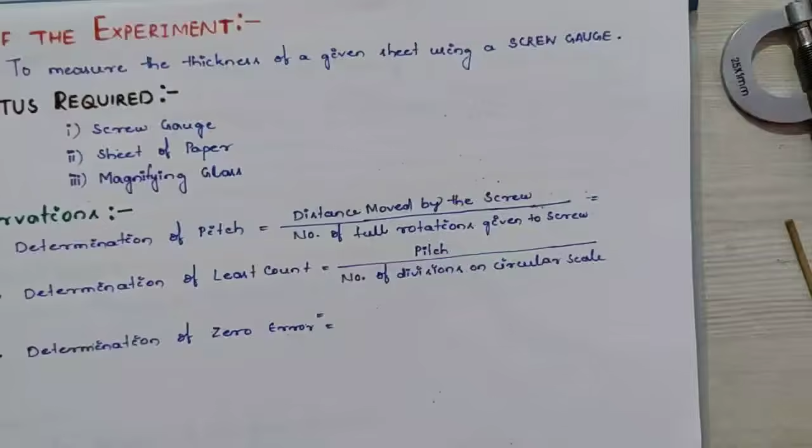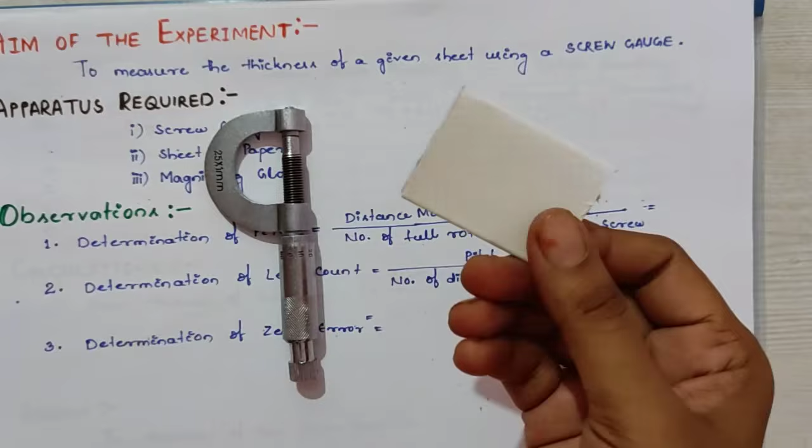Now we will see another experiment using screw gauge, to measure the thickness of a given sheet, that means a paper sheet, using a screw gauge. The apparatus are the screw gauge and a paper sheet, which I have folded like this manner. So we have to measure the thickness of this paper folding.

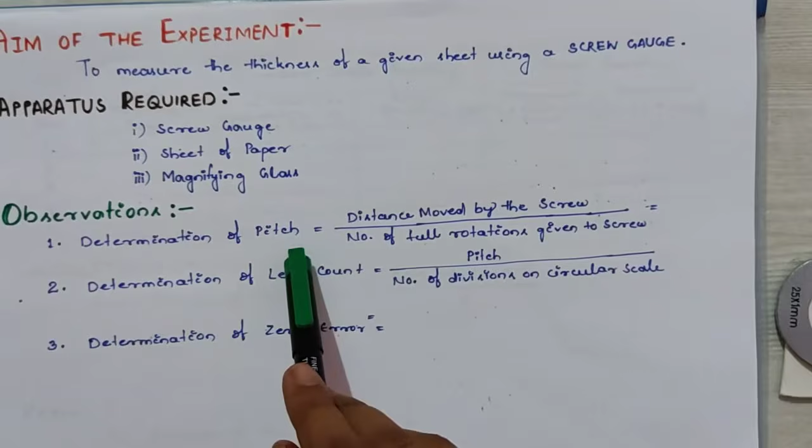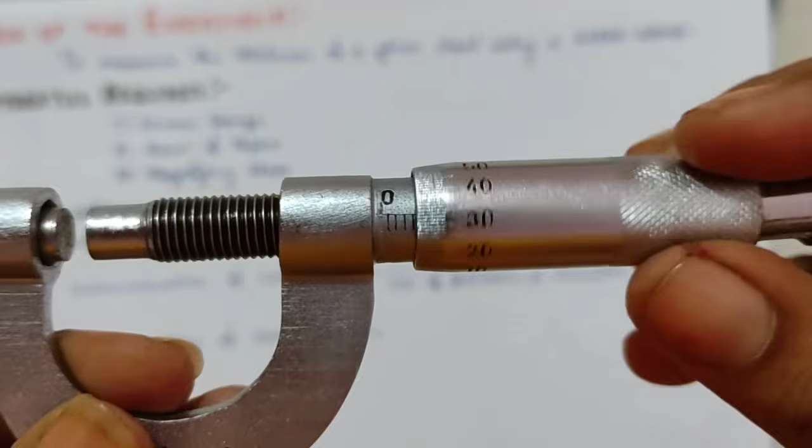Before that we will determine the pitch of this screw gauge. Suppose I am opening it to the 5th division of the linear scale. Yes, it is 5 now. So the reading on the linear scale is 5, and we have to mark the number of complete rotations. Here we have just completed 1,

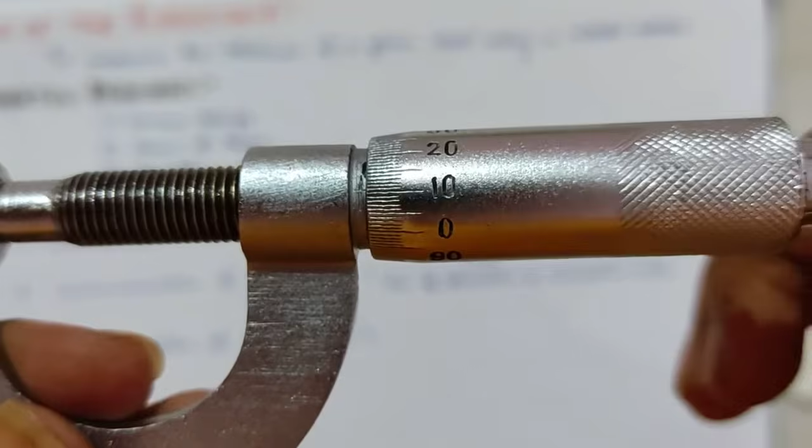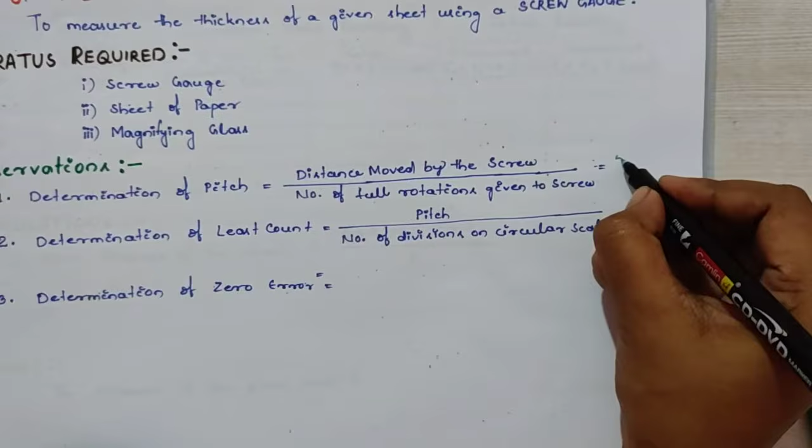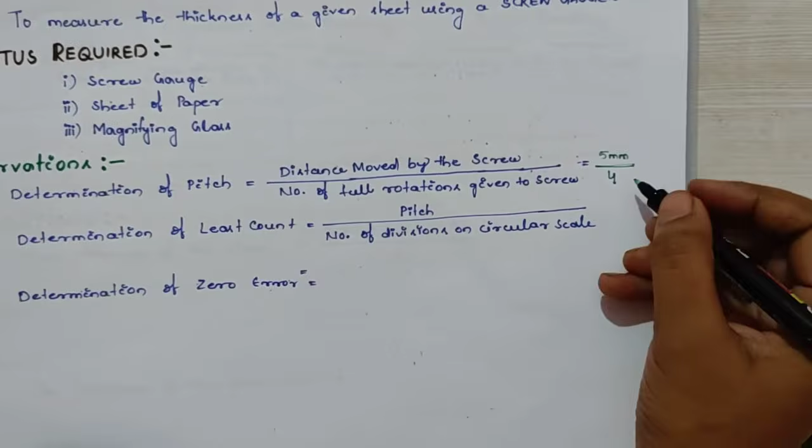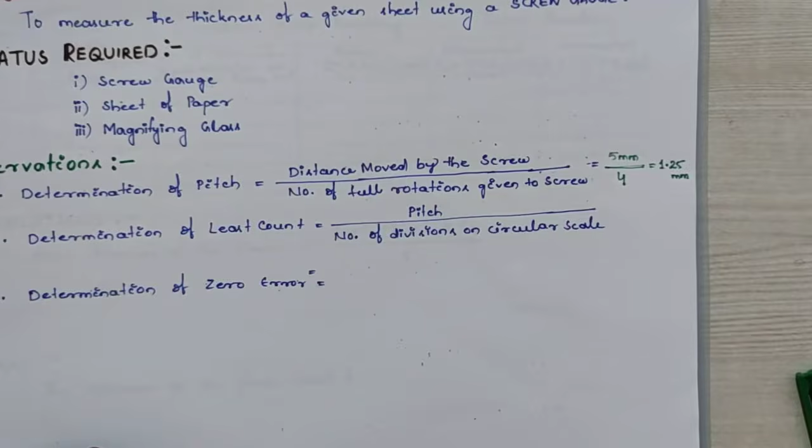2, 3, 4, and done. So we are getting 4 complete rotations. We just saw that the distance moved by the screw is 5 millimeter, and the number of full rotations given to the screw to cover this distance is equal to 4. So pitch equals 5 divided by 4, which is 1.25 millimeter. So the pitch of this instrument is coming as 1.25 millimeter.

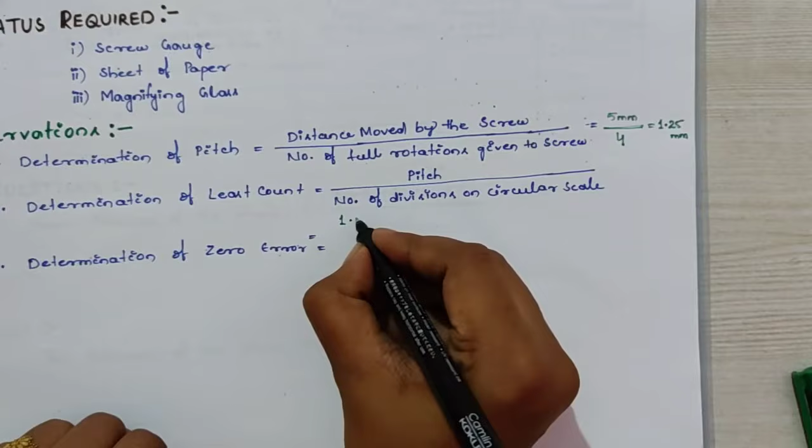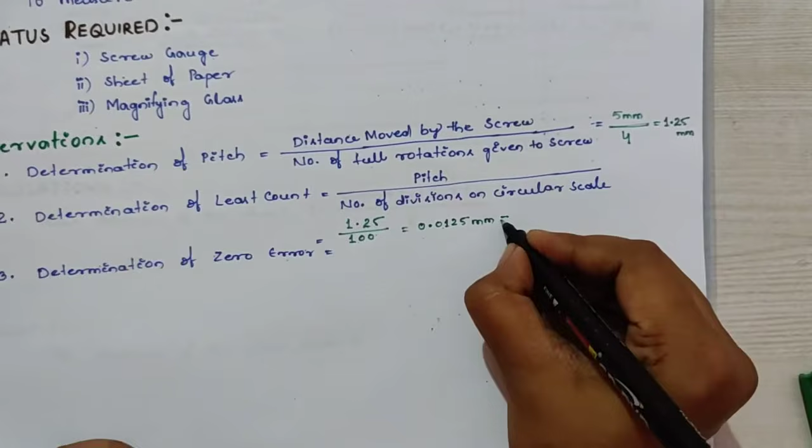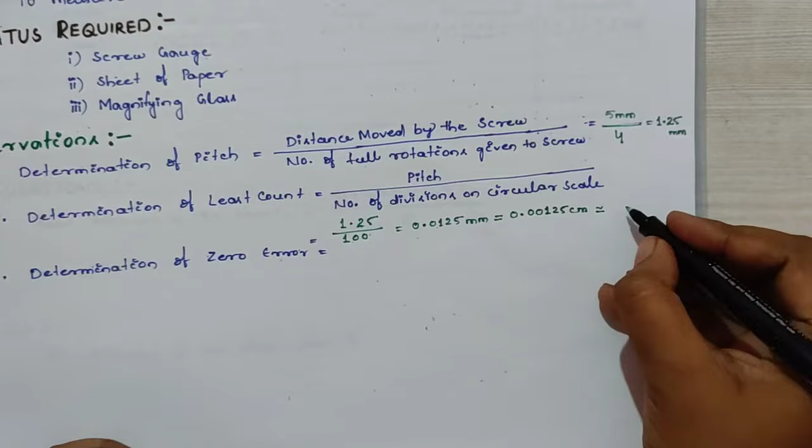Next, we have to determine the least count, that is equal to pitch divided by number of divisions on the circular scale. So that will be equal to 1.25 divided by the total number of divisions, that is 100. So that will be equal to 0.0125 millimeter, or 0.00125 centimeter. As we know, generally the least count of the screw gauge is taken to be 0.001 centimeter, so we will consider this one.

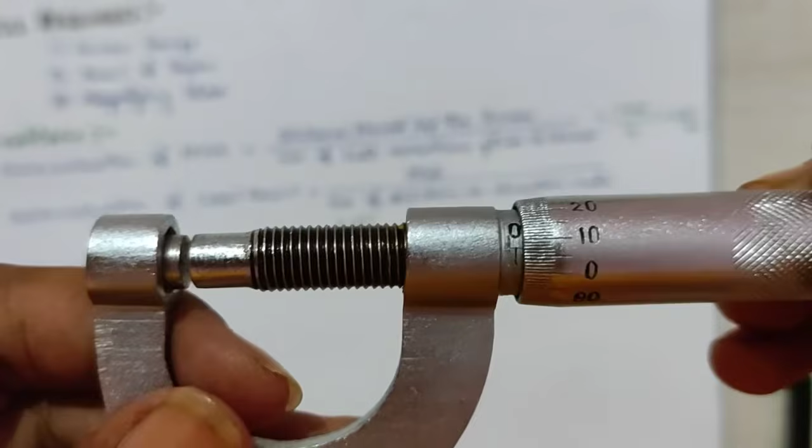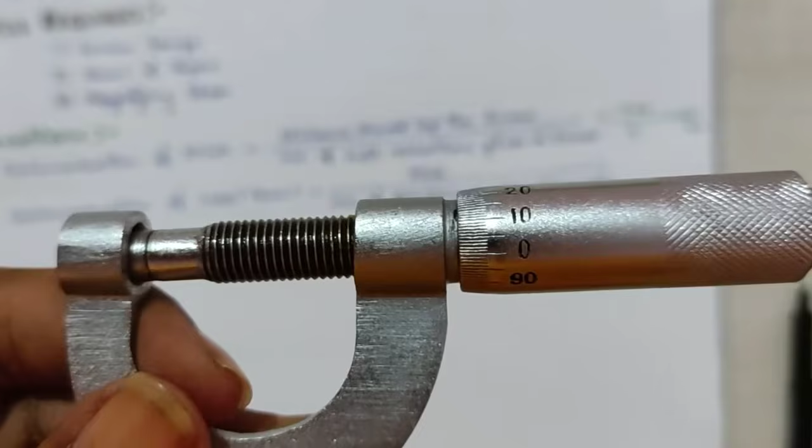Next part, the determination of zero error. Let me open it and close it so that you will see the 0 of the reference line and the 0 of the circular scale. Yes, so you can see here, this is the 0 of the linear scale, and here is the 0 mark of the circular scale.

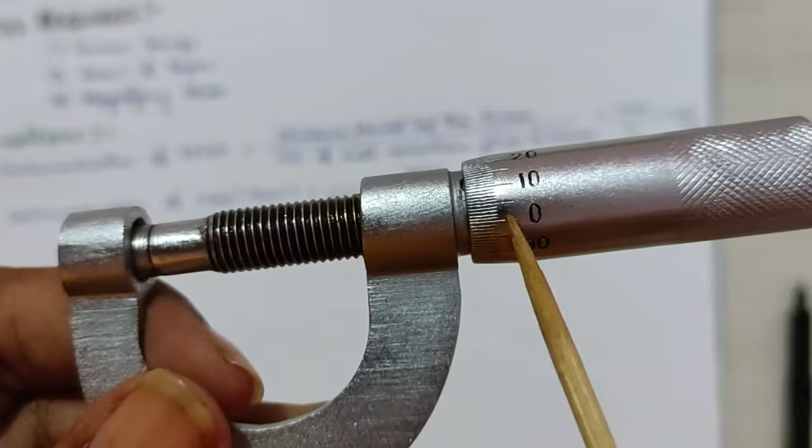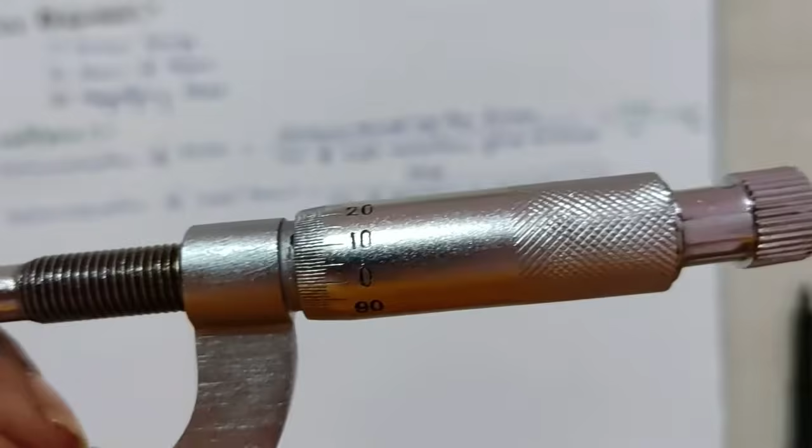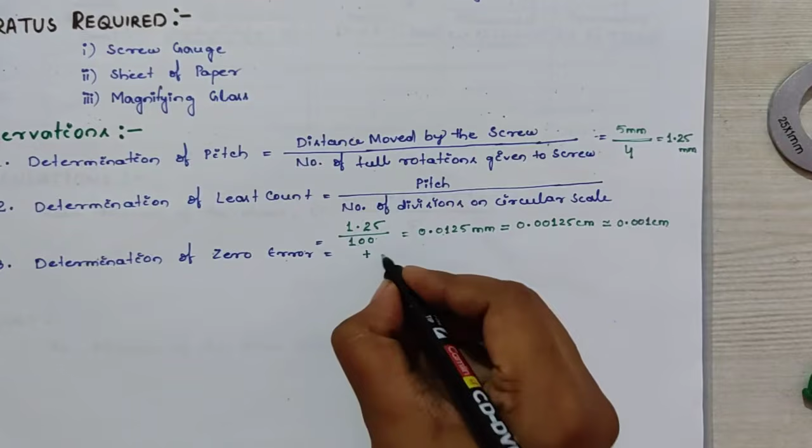Here we can see that the 0 of the circular scale is lying behind 7 divisions, that is 5th, 6th, 7 divisions behind of the linear scale 0 mark. That means this instrument has a zero error, which is positive zero error. So we can write it as determination of zero error, it's a positive zero error. So now I can write the zero error as plus 7, because this 0 of the circular scale is lying 7 divisions behind the 0 of the linear scale.

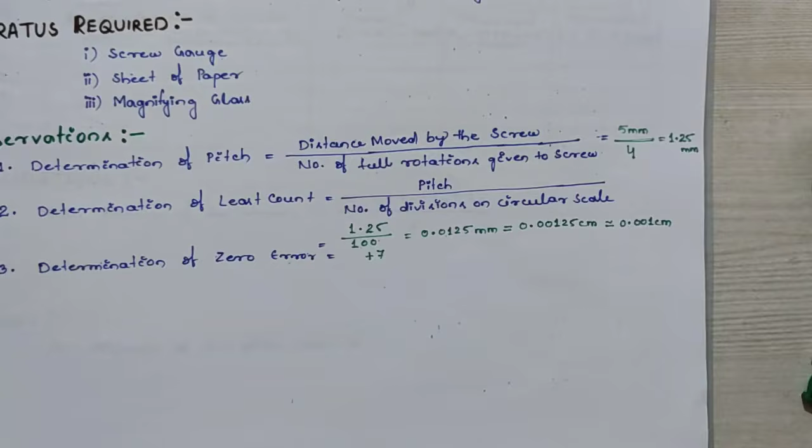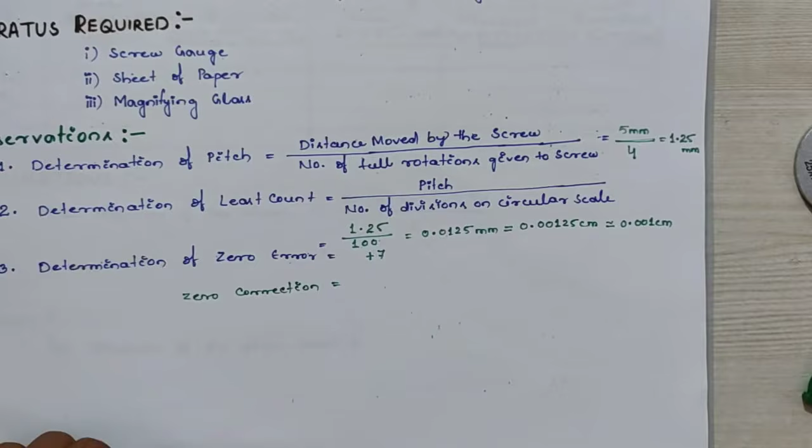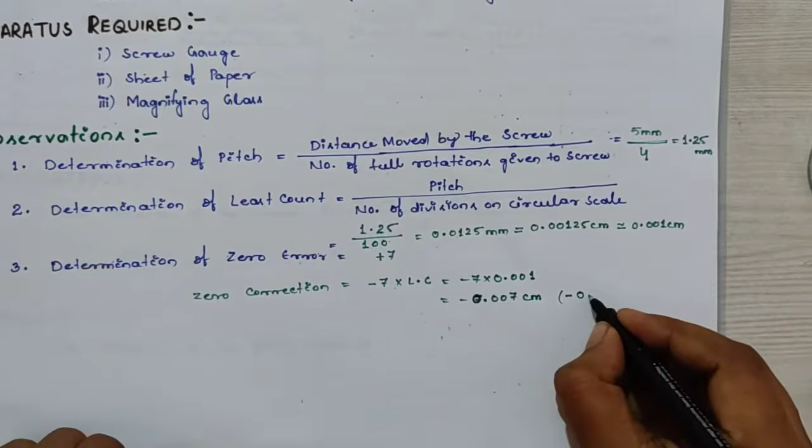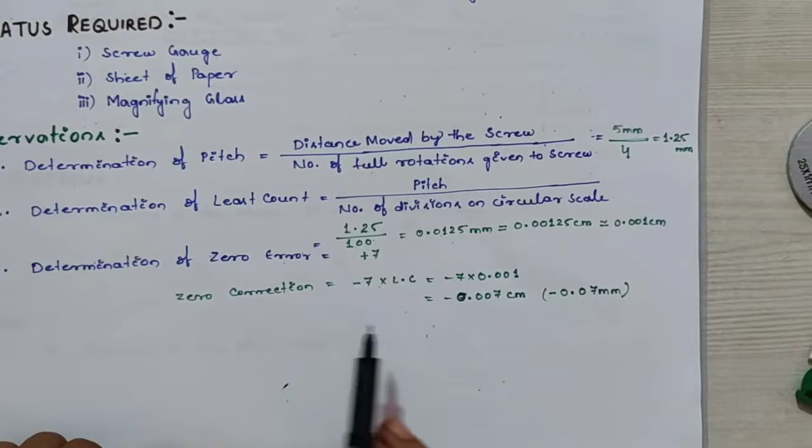Next part, we need to find the zero correction. Since the zero error is positive, the zero correction will be negative, and that will be equal to minus 7 into least count. So that is minus 7 into 0.001 centimeter, that will be minus 0.007 centimeter, or we can write it as minus 0.07 millimeter. If I consider 0.01 millimeter as the least count of the instrument, the zero correction will be minus 0.07 millimeter or minus 0.007 centimeter.

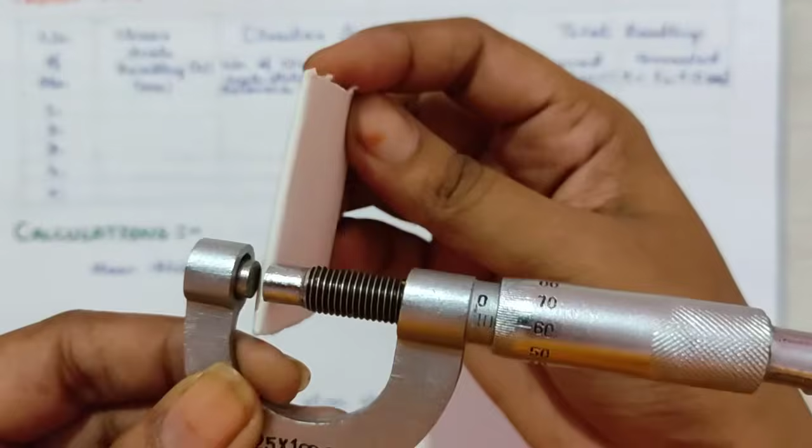So next we will move to the measurement of the sheet. First of all, we have to open the plane surfaces and put this sheet of paper, or paper folding, within the place, and make it tight so that it will hold the paper piece sharply. Yes, it is perfectly fixed now.

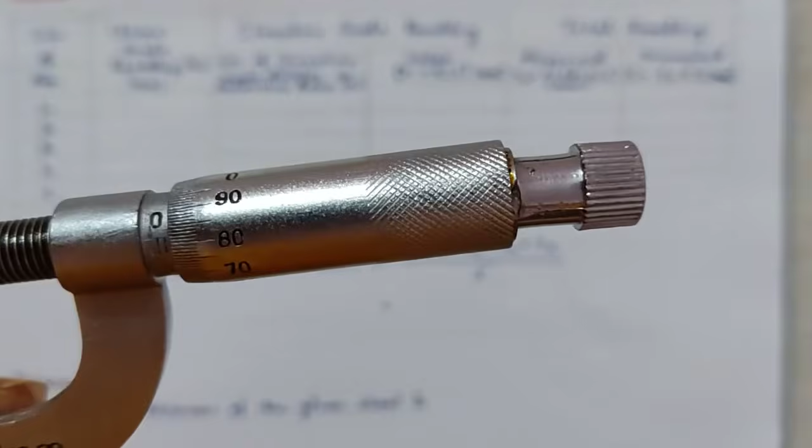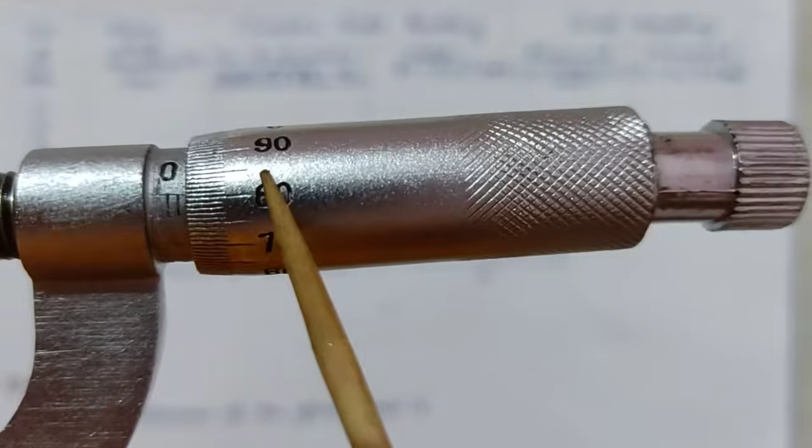Okay, so now first of all let's mark the linear scale reading here. As you can see, it has completed 3 divisions on the linear scale. So the linear scale reading will be 3 millimeter, and the circular scale division will be equal to, as you can see, just checking by eye level, it is coming as 80 divisions on the circular scale.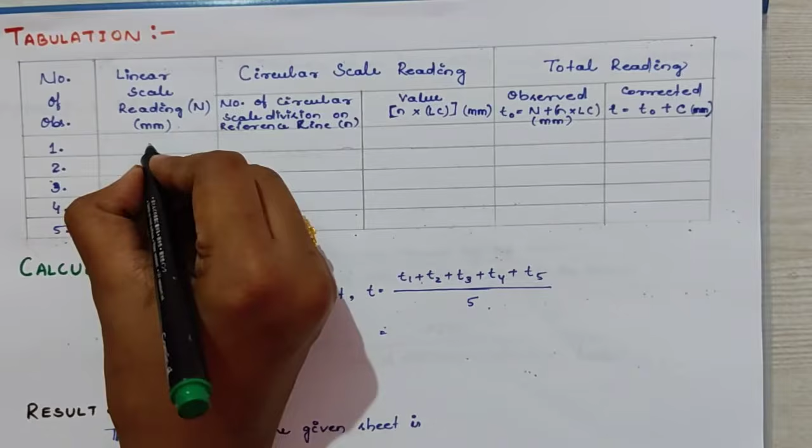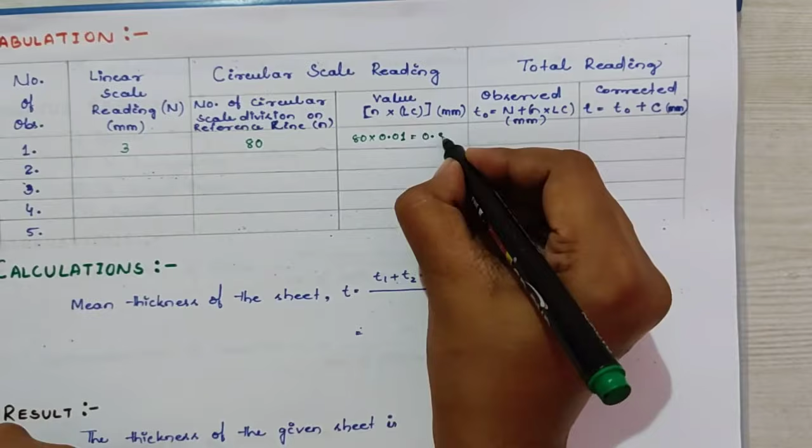Linear scale reading is equal to 3 millimeter, number of circular scale divisions is equal to 80, and the value of circular scale reading will be 80 into the least count in millimeter, that is 0.01 millimeter. So this will be equal to 0.8 millimeter. Now the observed thickness of the paper folding or paper sheet will be equal to the sum of this linear scale reading and the circular scale reading.

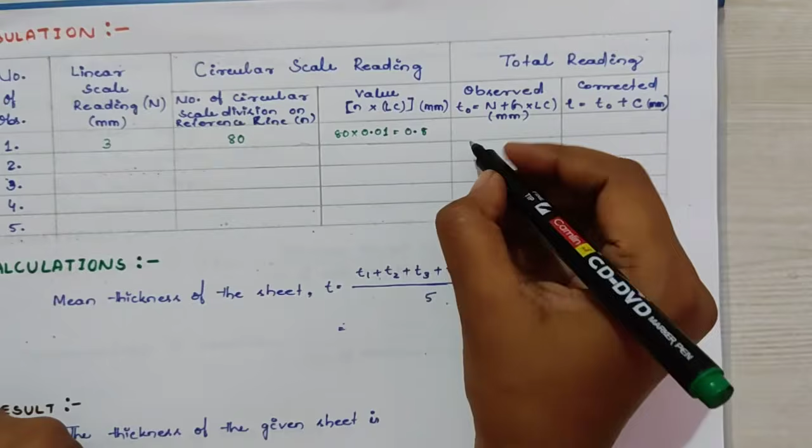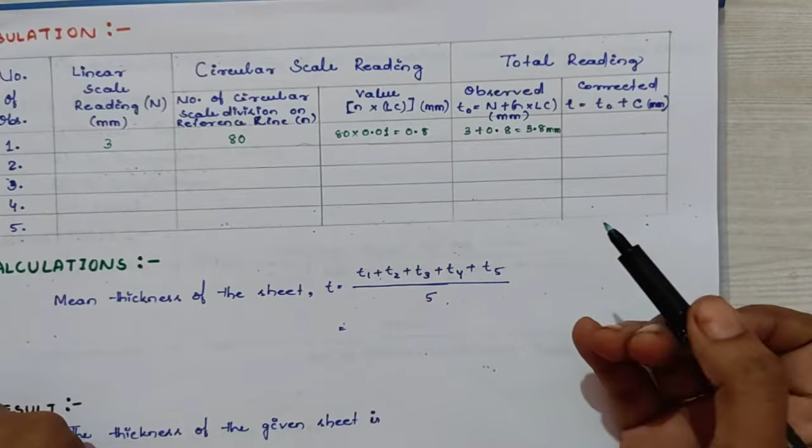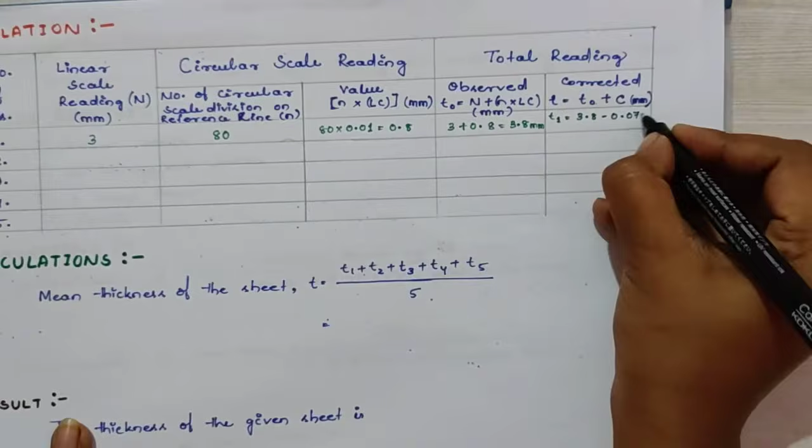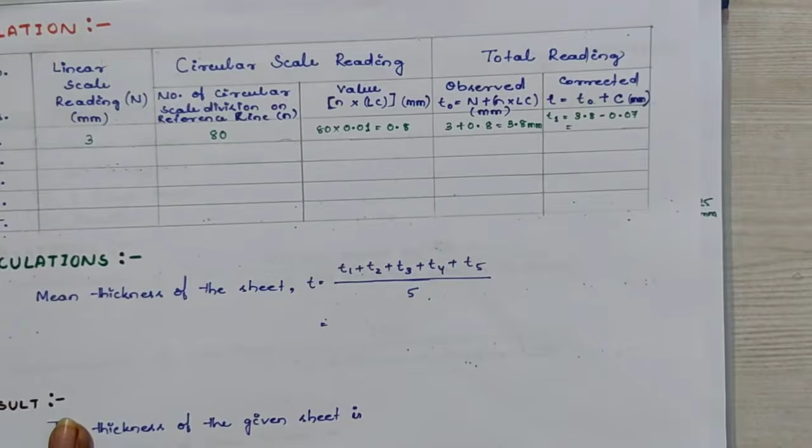So that will be 3 plus 0.8, that will be 3.8 millimeter. The corrected thickness will be the sum of observed thickness and the zero correction, which we know from the previous case is 0.07 millimeter. So we have to add this, that means T1 will be equal to 3.8 minus 0.07 millimeter. So that will be equal to 3.73 millimeter.

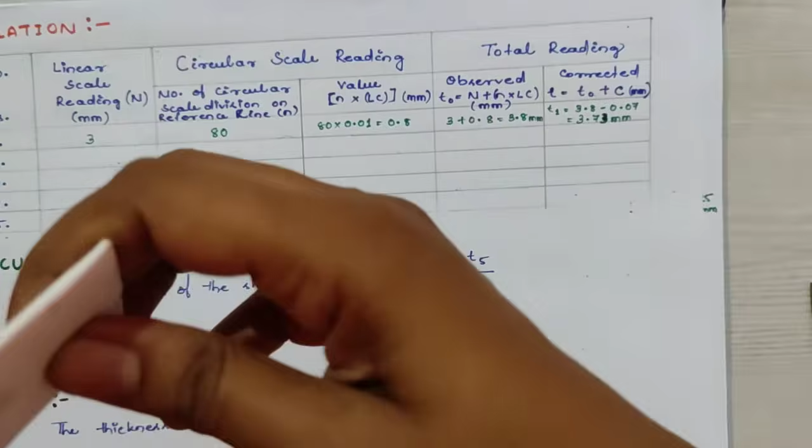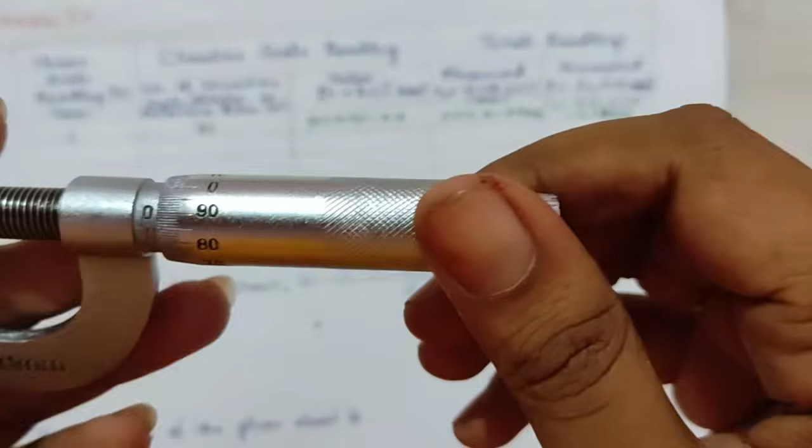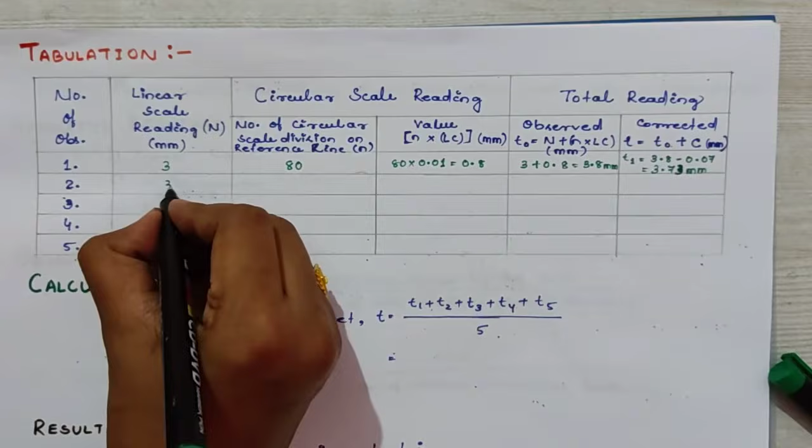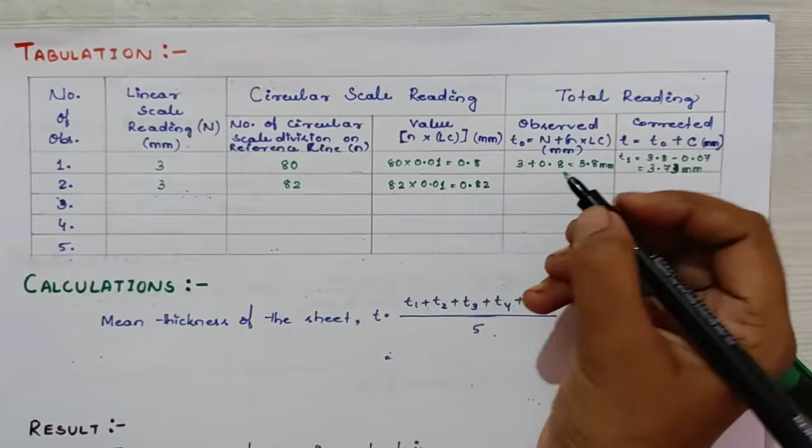This is 3 actually. So similarly we will continue for the next 4 observations. Now let us fix the paper folding at some other place. We have to fix it like this, and let's observe what linear scale reading we are getting. Again it is coming as 3 divisions, and the circular scale division on it is 82. We are getting 82 as the circular scale division and linear scale reading equal to 3 millimeter. So this will be equal to 82 into 0.01, that will be 0.82, and that will be 3 plus 0.82, or 3.82 millimeter.

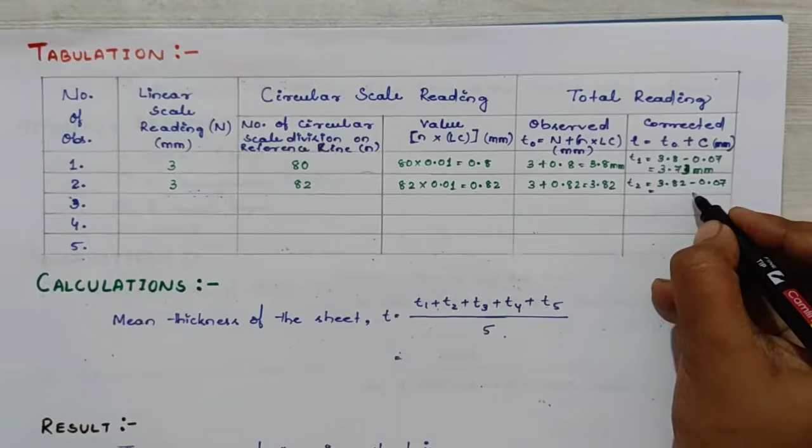T2 will be equal to 3.82 minus 0.07, so that will be equal to 3.75 millimeter. Okay, clear? So now let us take one more observation with it.

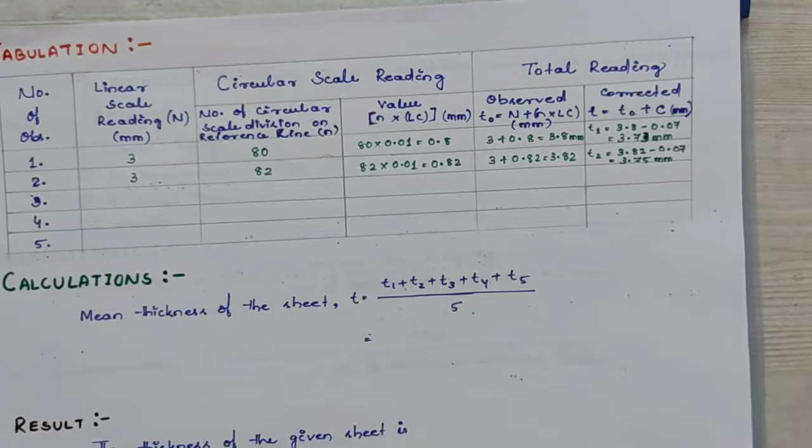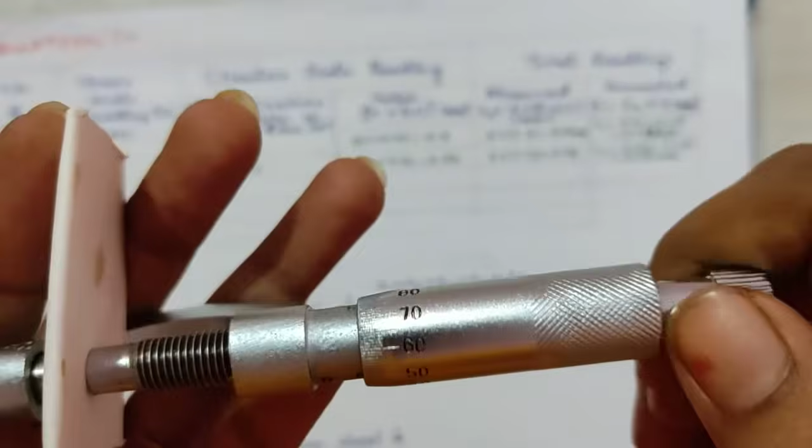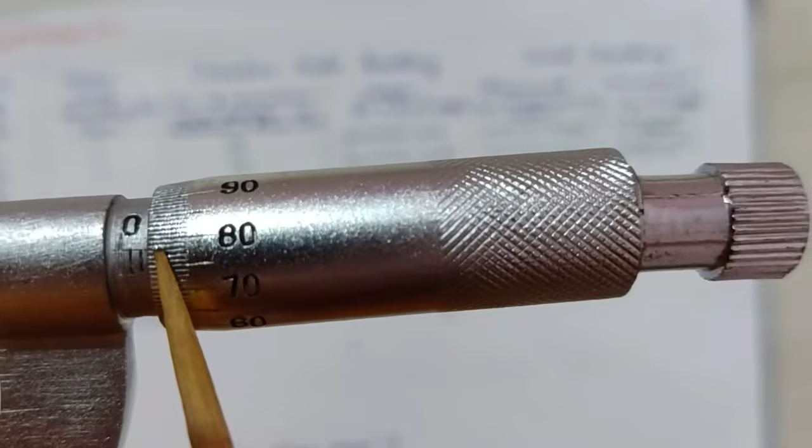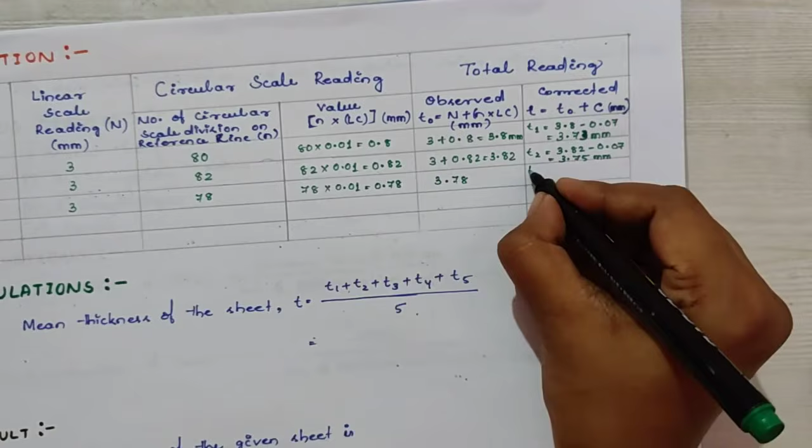I'm just fixing the paper sheet. Yes, it is perfectly fixed now. Now let us take the linear observation. Linear scale reading is again equal to 3, and the number of circular scale division is coming as 78. This line is coinciding with it. So this is 78. This is equal to 3, this is equal to 78, so that will be 78 into 0.01, that will be again 0.78. That will be 3.78. And here T3 will be equal to 3.78 minus 0.07, so that will be equal to.

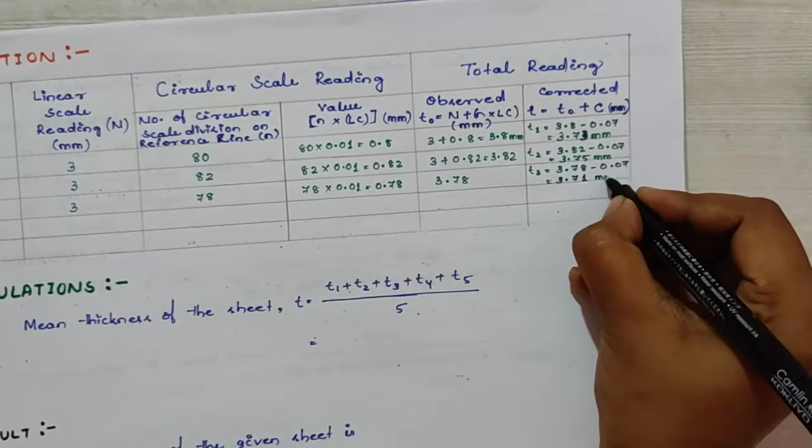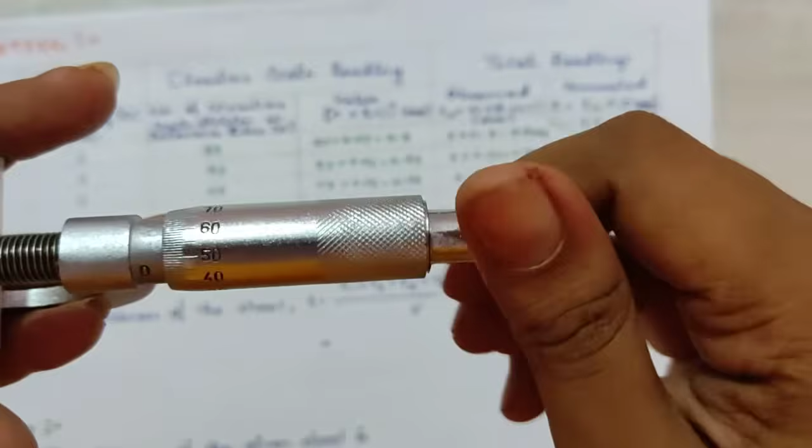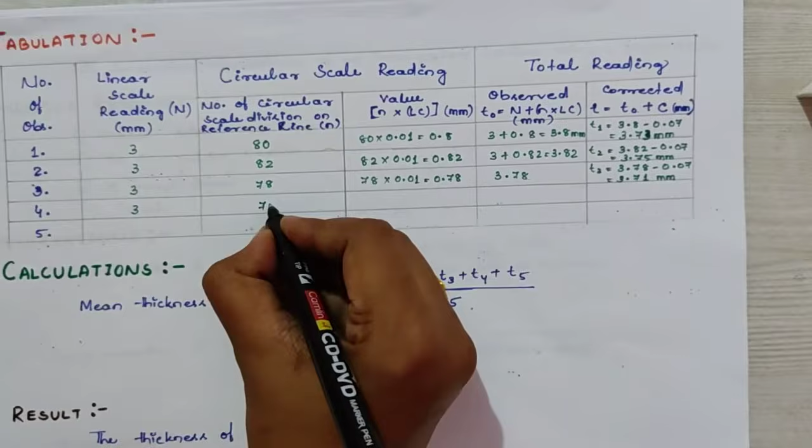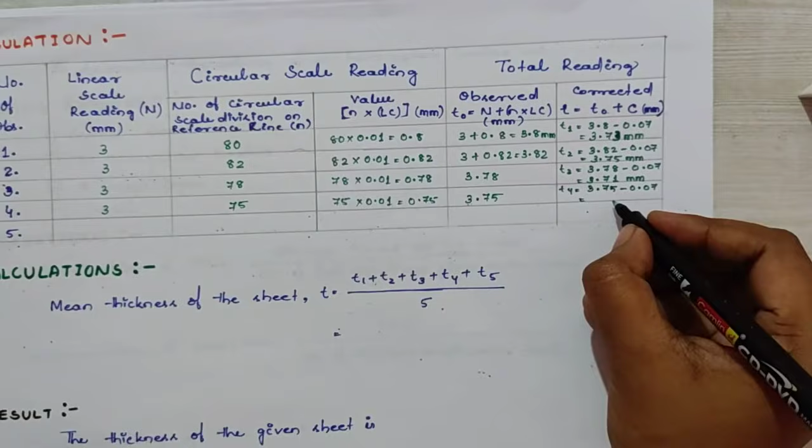3.71 millimeter. Okay, clear? Now let us take one more set of observation with it. I'm just trying to fix the paper sheet properly. Yes, it is fixed, and the linear scale reading is again equal to 3, and here it is little more, 75 is coming as the circular scale division. This is equal to 3, this is equal to 75, so that will be 75 into 0.01, that is 0.75. This is equal to 3.75, and T4 will be equal to 3.75 minus 0.07, so that will be equal to 3.68 millimeter. Okay, clear everyone?

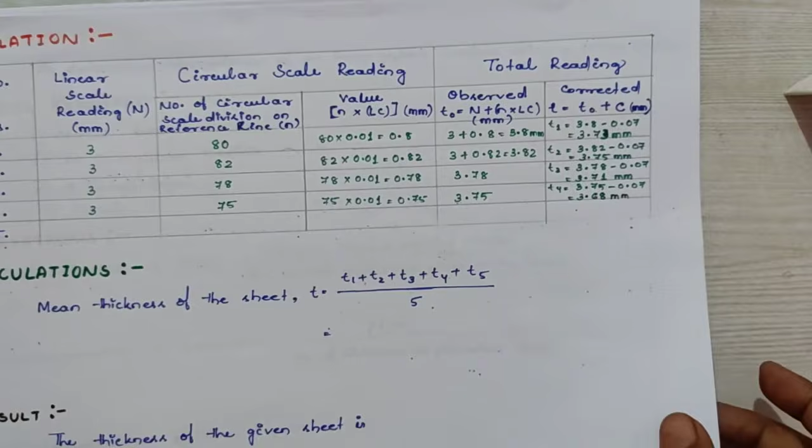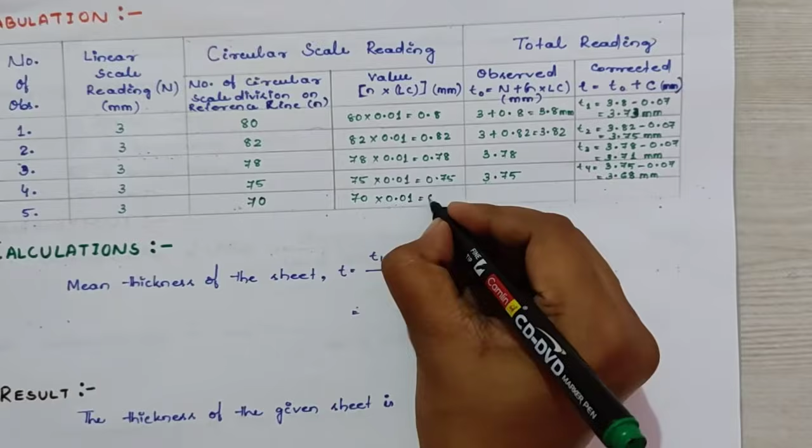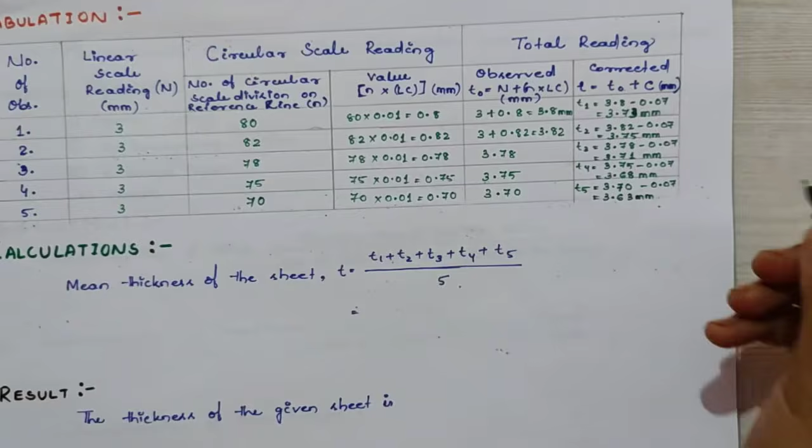Now the last set of observation. First of all, we have to place the paper sheet in between the studs. Yes, it is fixed now. Let us take the linear scale division here. It is again equal to 3, and this is coming as 70. So this is 3, this is coming at 70, so 70 into 0.01, 0.70 will be the value of circular scale reading. This will be 3.70, and T5 will be 3.70 minus 0.07, so that will be equal to 3.63 millimeter. Okay, we just got our all 5 sets of thickness with zero error.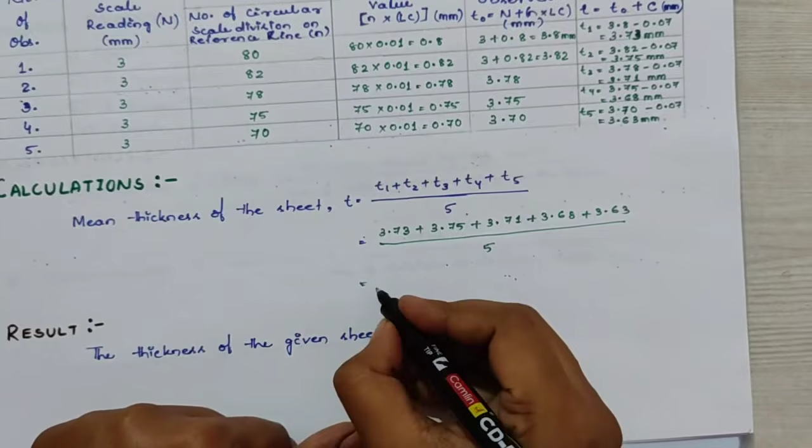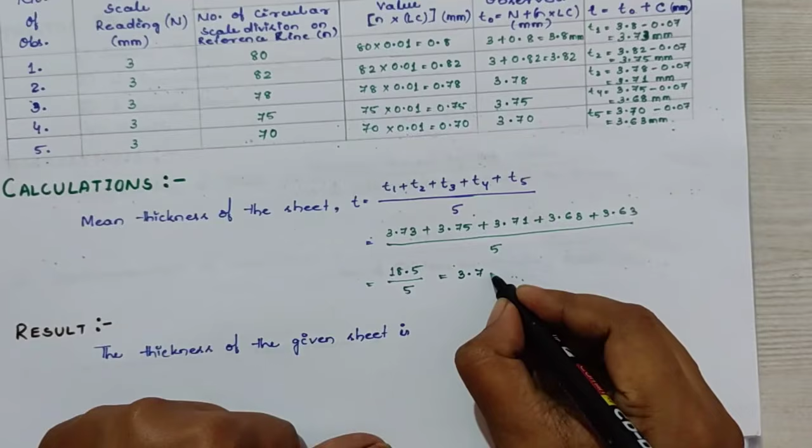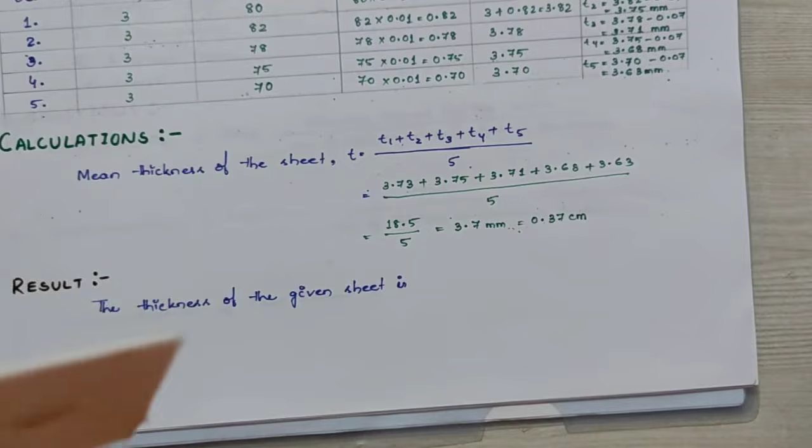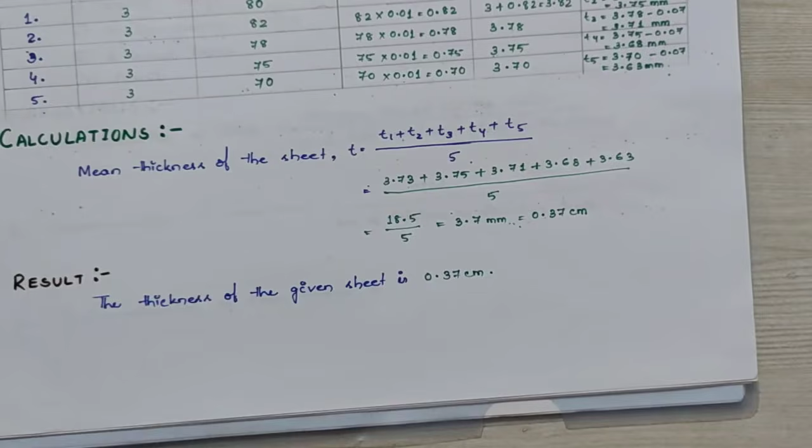Now let us find out the mean thickness, and that will be our result. So that is equal to the sum of 3.73 plus 3.75 plus 3.71 plus 3.68 plus 3.63, divided by 5. Now we have to add it, so that will be almost equal to 18.5, now divided by 5, so this will be equal to 3.7 millimeter. But we have to measure it in centimeter, so that will be equal to 0.37 centimeter. So we can say the thickness of the given sheet that we used for the measurement purpose, that is a paper folding I have used. So the thickness of this paper folding is coming as 0.37 centimeter. Okay, so that's all about the experiment of measuring the thickness of a given sheet of paper.